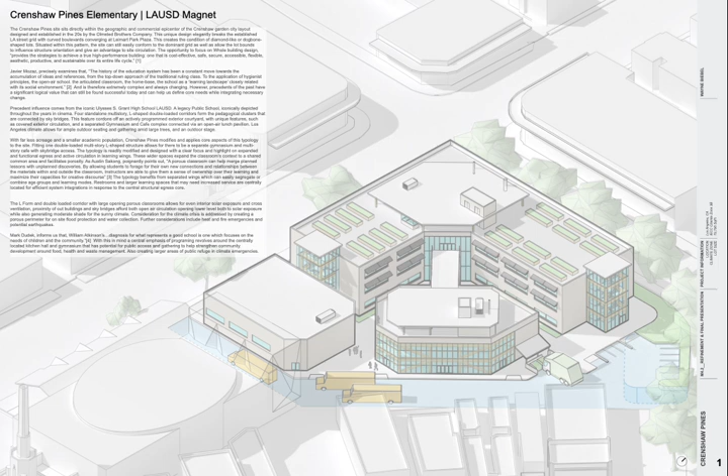The average age in Los Angeles is 37, meaning there are a lot of young families. In Leimert Park specifically, 11% of the total population is newborn to 9 years old, indicating a critical need for early and elementary education. Further increasing that need is the fact that the LA Unified School District has lowered the entry age into pre-K programs, as well as extended start times in the district for easier transportation for young families. These are all cultural contexts that Crenshaw Pines seeks to respond to.

I began my precedent analysis with the Open Air School in Amsterdam, completed in 1930, a functionalist piece of architecture that was ahead of its time, focused on health and well-being, recognizing that early age development should be placed in a joyful, warm, nourishing environment. It should also be protective.

What I really liked about this was the common vernacular in Amsterdam of courtyard blocks and apartment buildings - the elementary school is placed within the courtyard with a kind of guardhouse, cordoned off with very direct access, seen but not seen. I really enjoyed this integration within the grid.

My curiosity piqued, I also investigated a very famous school shot extensively in cinema and television over the years: Ulysses S. Grant. I wanted to understand more about what legacy schools were like in Los Angeles, and unsurprisingly, they have very active and engaged programs with dynamic landscapes, covered walkways, sky bridges connecting buildings, open air lunch pavilions, standalone gyms, and extended grounds. Yet it's still very cordoned off and regimented, fitting within the overall one mile square block grids of the Los Angeles urbanscape.

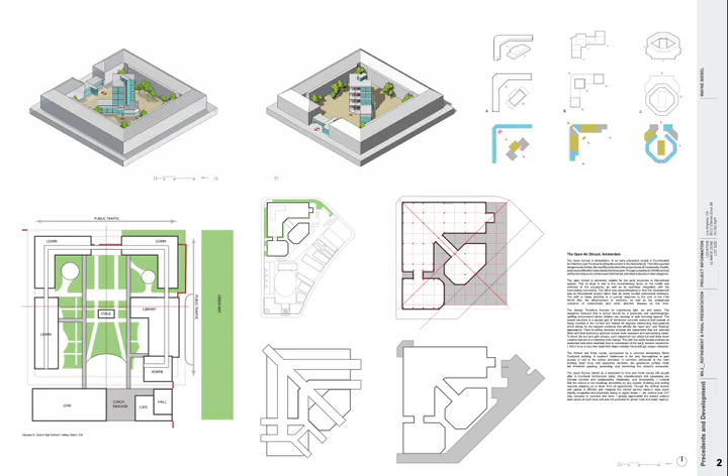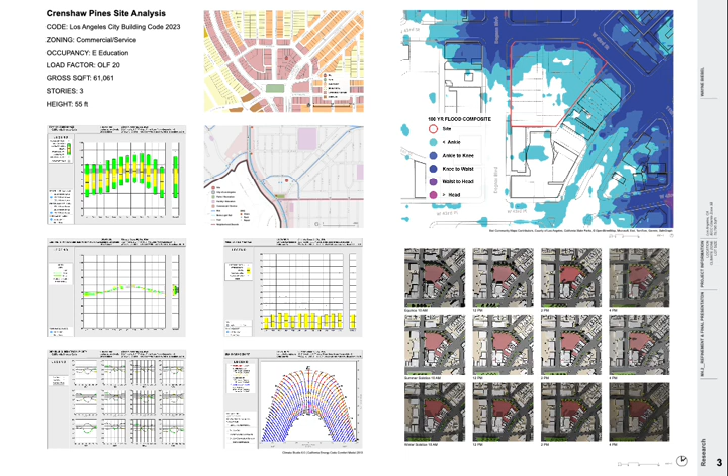Los Angeles is famous for its beautiful weather - pretty much sunny skies all year round, average mid 70s, west to east breeze off the ocean - but it's also known for earthquakes, fire hazard, and even some flash flooding. These factors are considered as well.

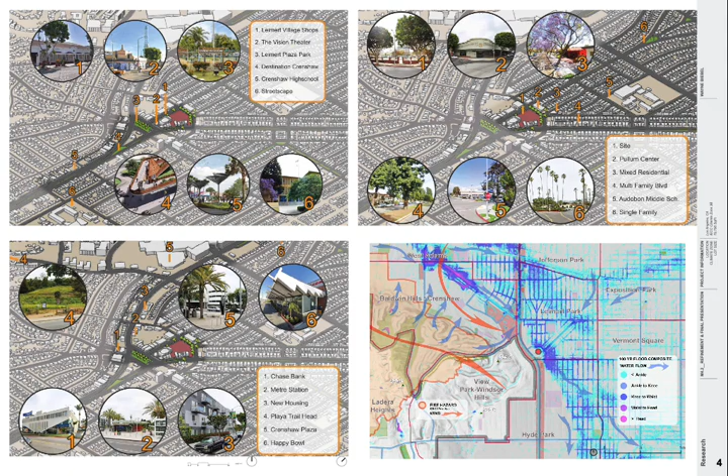As mentioned before, Crenshaw is a rich, diverse neighborhood with an eclectic history, but really is central to LA in a lot of ways. The Crenshaw corridor comes through this neighborhood, and the site is located in a very accessible, connected way to the local community, which I think is a great benefit to the site.

Though the overall pedagogical programming is somewhat standardized, it's a dual-loaded corridor in an L form, much like the Ulysses S. Grant Legacy School. The corridors are expanded with gaps to increase spillover, class porosity, and collaborative project-based learning. These expanded corridors also increase flow for egress and overall site circulation, and will also come in handy with the MEP, as we'll see later.

Key features I enjoy about the programming in this setup are the multi-story centralized cafe halls. The upstairs kitchen is kind of an a la carte secondary overspill, but also a learning kitchen where students can engage with their food in an educational manner.

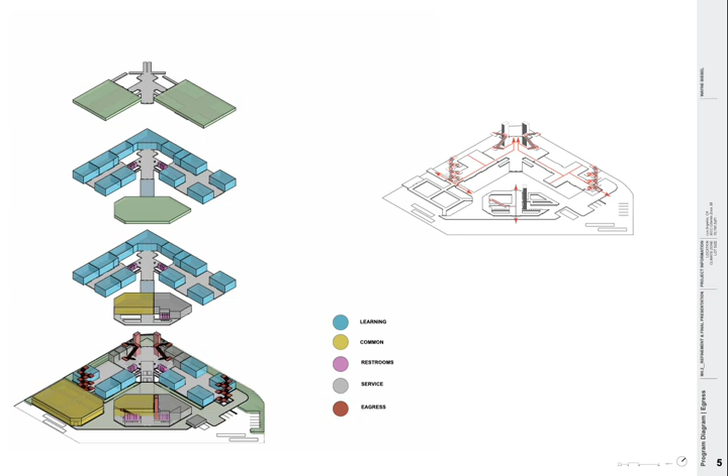Here we can see overall site circulation as it responds to the community. Something I'd like to point out here is that the bus lane is a crucial part of the overall program, again in response to the need for transportation. This bus lane can fit comfortably 12 full-size buses. It will also act as a porous pathway that will help with water flow in 100-year flood situations.

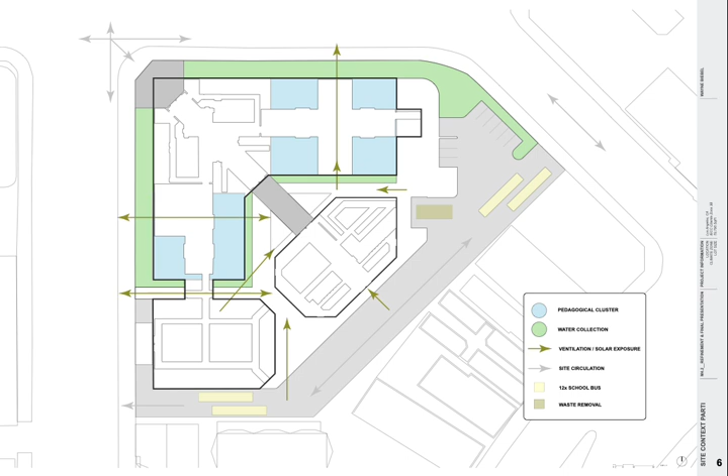The solar orientation is again piggybacked right off that Ulysses S. Grant High School. We're just chopping it into a quarter of the school and condensing the auxiliary buildings.

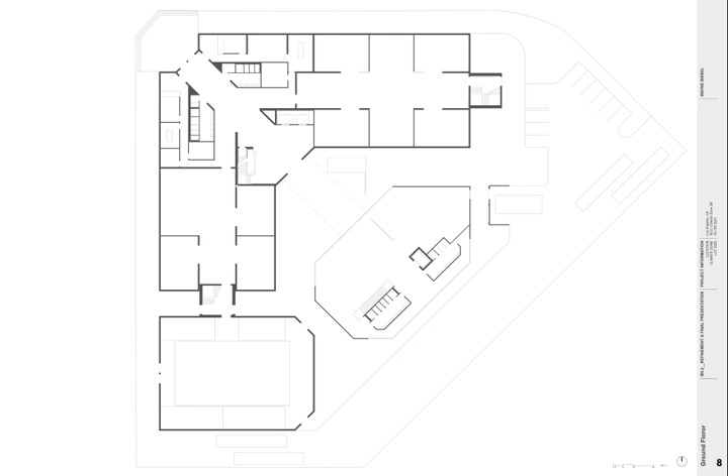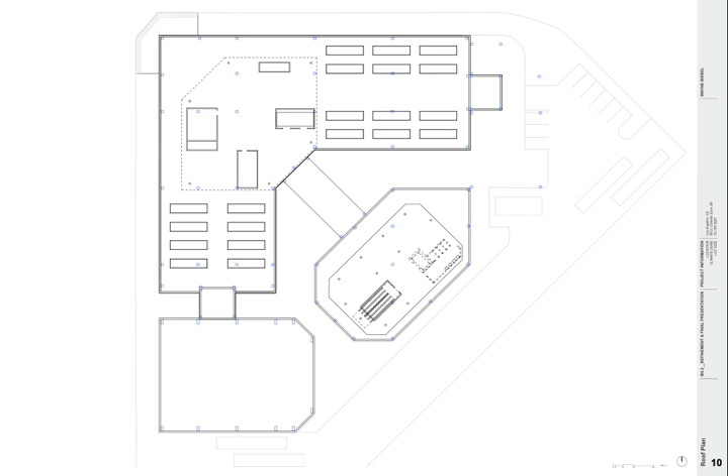The plans are somewhat repetitive. On the roof plan, we have two shaded pavilions, which are open air educational spaces, and about 3,500 square feet of vegetable beds for project learning on the roof, which also offers beautiful views of the city and the ocean.

Structurally, we have a combination foundation with the basement mechanical room, stem wall, with also footed slabs on grades with CLT and mass timber structures.

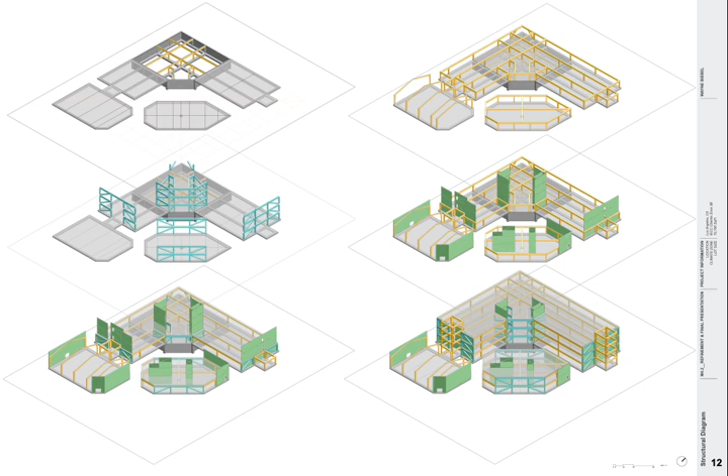While in development, I became aware of what is known as the re-entrant corner shear weakness, due to the center of gravity during earthquakes and shifting plate tectonics. So I moved the CLT vertical circulation core masses closer to that center of gravity and developed a mass timber chevron bracing element that hugs and supports that corner.

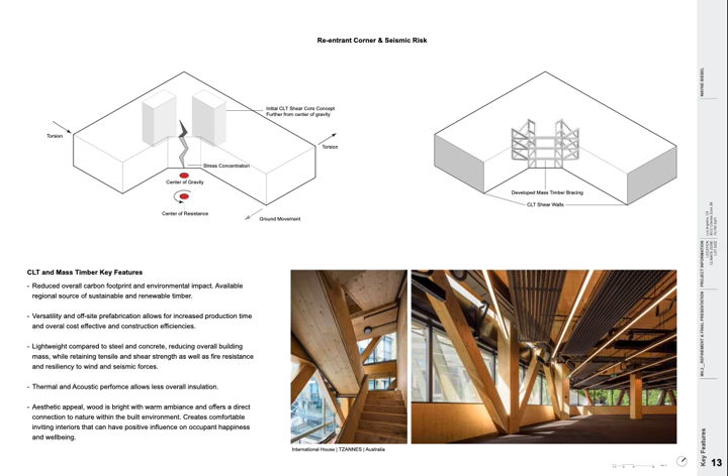This also gives us the opportunity for the stairwell to become a light monitor, and the facade to ease egress and also open up the center of that school and that circulation to passive solar in the winter months.

The porous bus lane, the porous landscape, and the roof capture rain system all feed into an underground water vault strategically located to mitigate storm waters and retain water for fire risk emergency or drought emergencies. Building orientation and hierarchy plays a lot into shading and cross ventilation within the site program.

Passive shading structures were needed for southern and western exposure on the interior classroom windows. So I chose to use an active system, photovoltaic solar panels, as the passive shade system. These are not dynamic, just oriented for general capture, lightweight, simple structures that dual function as passive and active, giving us the opportunity to reclaim that roof space for pedagogical exterior educational space as well.

Curtain wall glazing systems are structurally held up by a wooden frame with very deep vertical mullions that act as solar fins for shading and thermal capture, helping regulate thermal and solar intake.

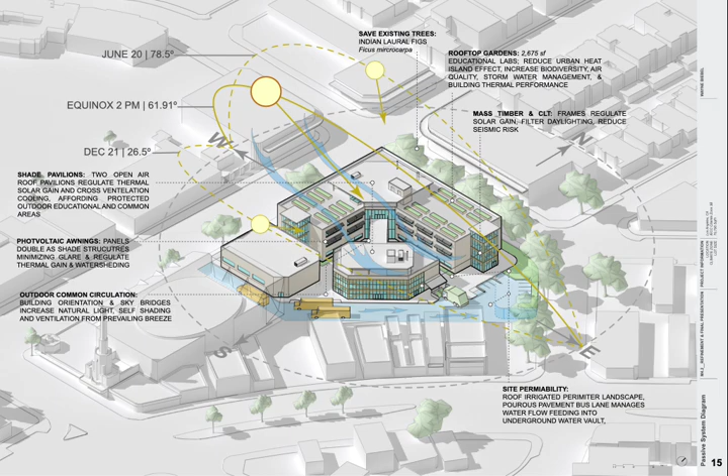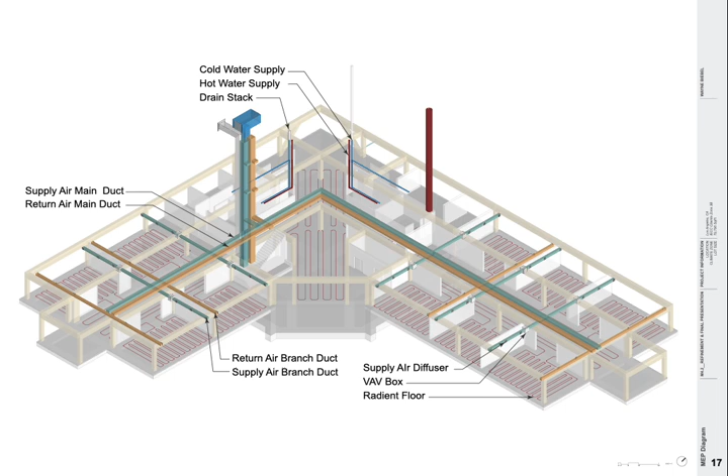The MEP mechanical room in the basement is simplified, centralized, and separated. Here we see typical MEP integration, along with the radiant slab, which works in conjunction with the thermal capabilities and regulatory nature of that wood thermal massing. The concept is that once the mass heats, it's a steadier, more regulated thermal distribution for comfort.

Obviously we know that heat rises and cool sinks, so during the summer months air conditioning would come in and wash over the classroom and recirculate, cooling it down, and vice versa—the heat would come up and be circulated with cool air and regulated.